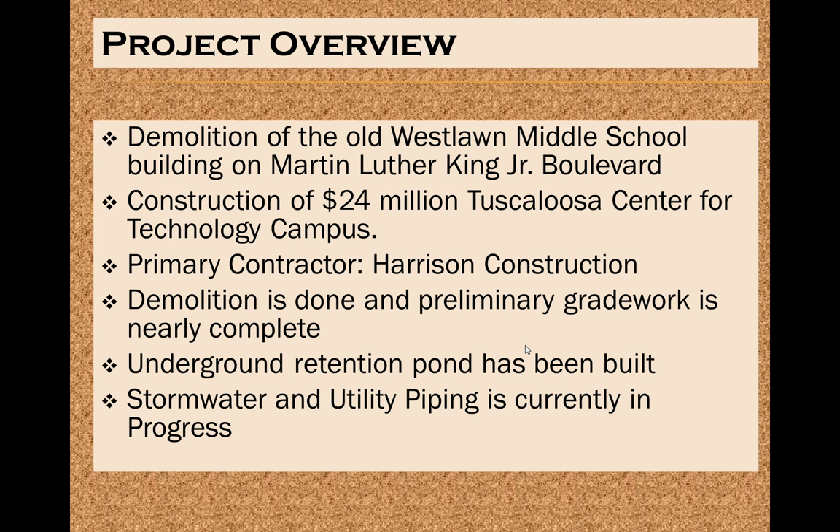Demolition is done and preliminary grade work is nearly complete. Underground retention pond has been built. Stormwater and utility piping is currently in progress, which brings us to observed cycle.

Subcontractor is Price Construction, utility and drainage system construction. Installation of 36 by 22 inch arch pipe, 8 feet joints, and total length observed 200 feet of pipe, straight line. Total time of observation is 3 hours 52 minutes. No backfill will be left exposed until January 15th.

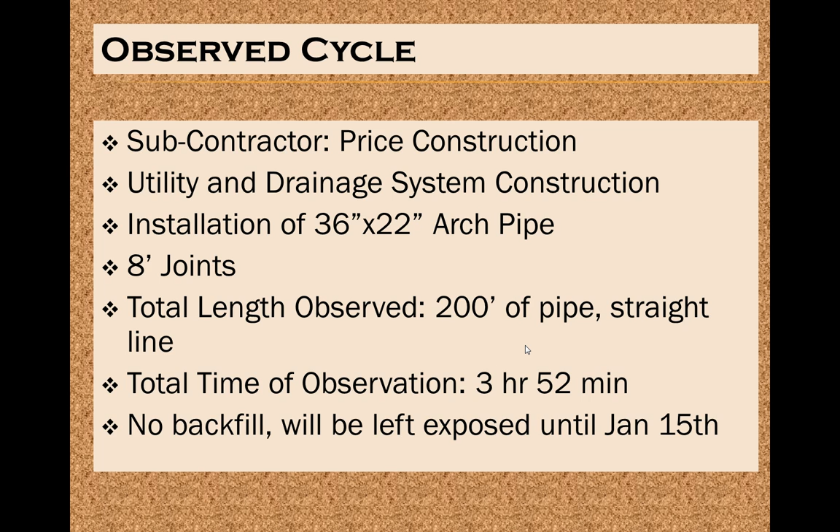Equipment used for this project included a Hitachi 270 LC crawler backhoe with 1.38 cubic yard capacity, John Deere 624H front end loader with pallet fork attachment, and 3 pipe fitters used as laborers. The following is a validated model of the entire project. The following 2 slides detail cycles within the model.

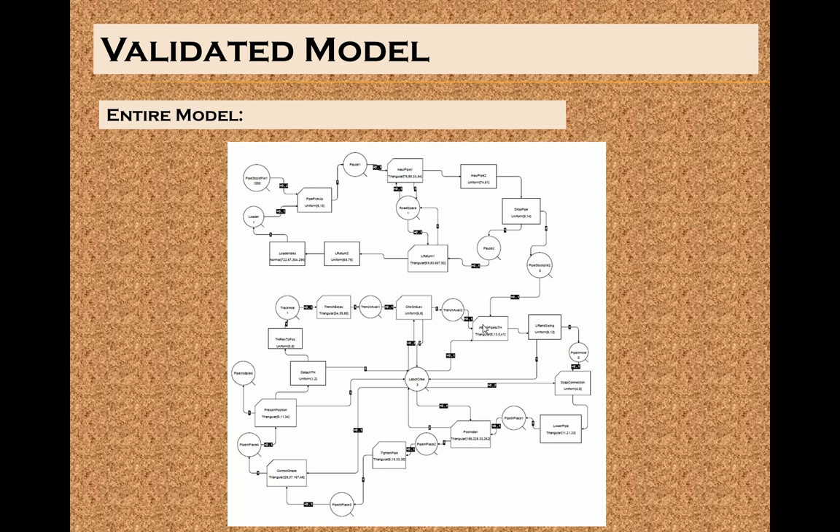Here's the top portion of our model. We separated it to make it easier to read. As you can see here, we start with a pipe stockpile and a loader, and that's the John Deere. The John Deere picks up the pipe and hauls it as far as it can, has to wait for traffic, and then once done with that, it continues the haul and drops the pipe off at the track hoe at the new stockpile. Then it continues to return, waits for traffic, returns a little bit more,

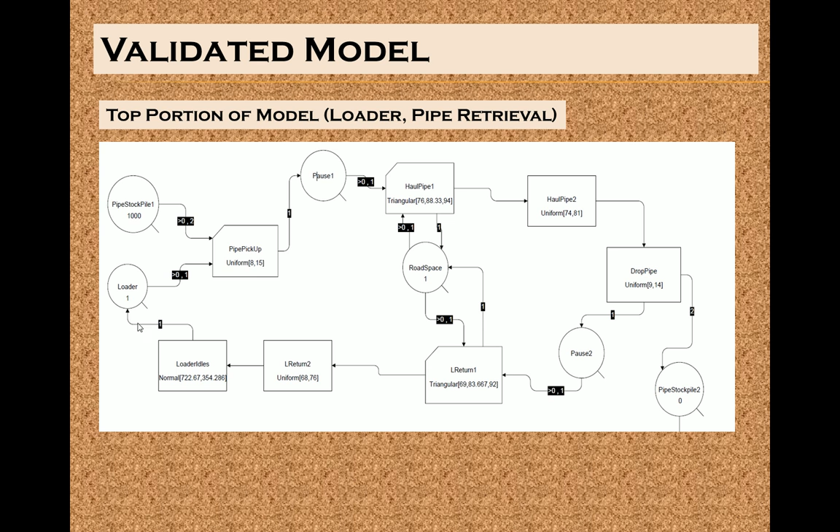and this idle time right here is not technically idle time. It was actually working on different portions of the project, but because those portions had no bearing on our part of the project, we just wanted to include those times for statistical analysis. That brings us to the next part of the model, which is the track hoe pipe fitters portion.

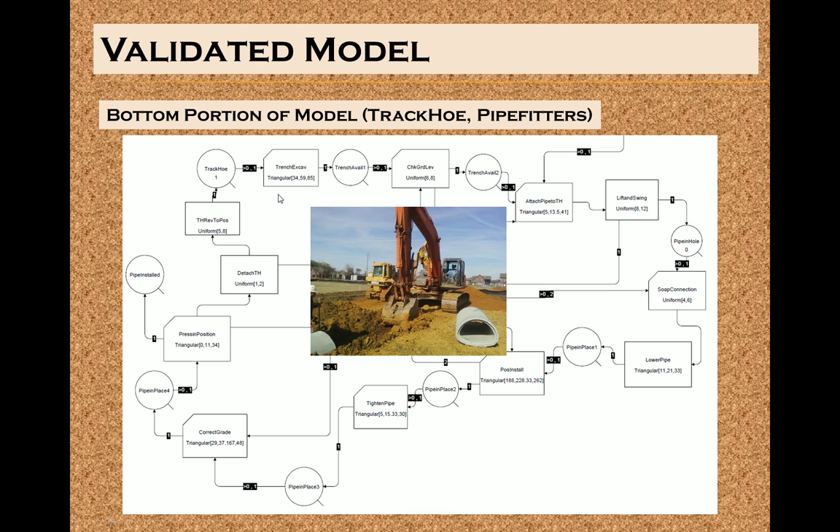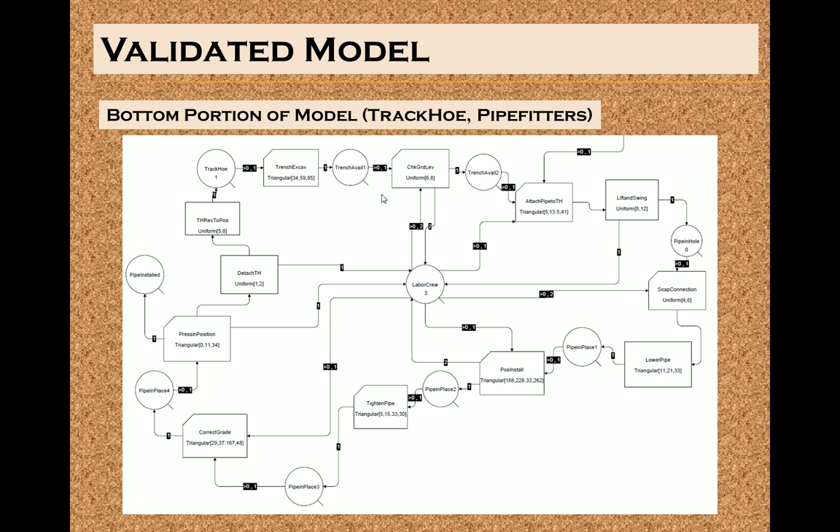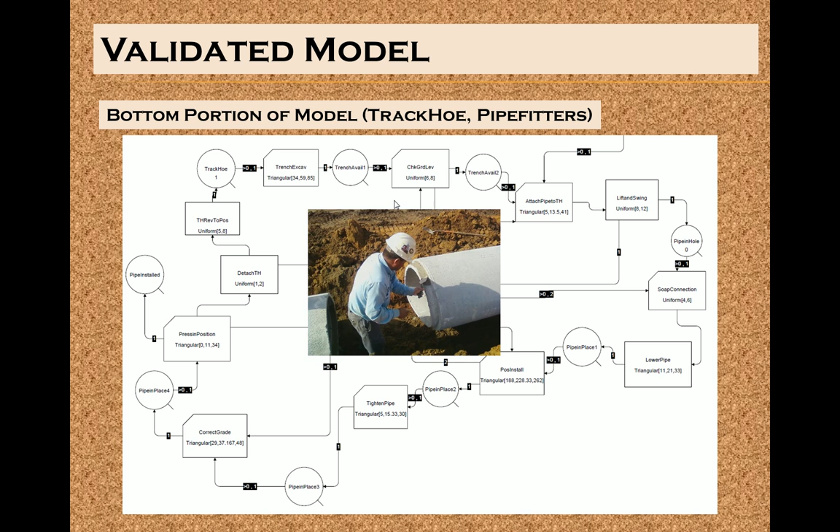While the pipe is being brought, a track hoe digs the excavation trench, and then once that's done, 2 laborers will check the grade, and then after that is done, a laborer attaches the pipe to the track hoe. Once that's finished, the pipe is lifted and swung to the hole, and once it's over the hole, a laborer soaps the connection, which is really just a cement type grout that eases the connection, and another laborer holds it in place while it's hanging off the track hoe. The pipe is lowered into the hole, position installed.

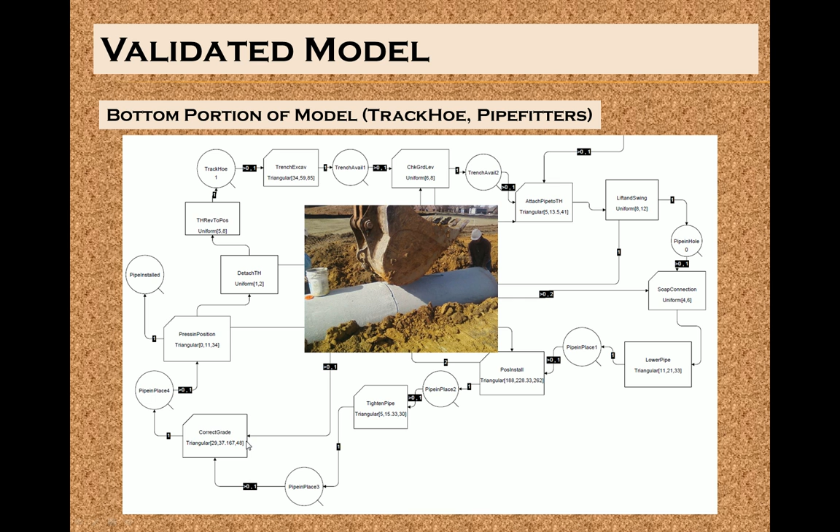Then here is the tighten pipe portion, where the steel cable is taut towards the back connection, and this makes a better connection for the pipe. Once that's done, laborers will dig a little bit and add a little dirt underneath the pipe to correct the grade, and then after that, the track hoe presses and positions the pipe by tamping lightly on the top to fix the grade. Once that's done, the pipe is installed and it goes to the pipe installed queue. Then the track hoe is detached, reverses, and the portion starts over.

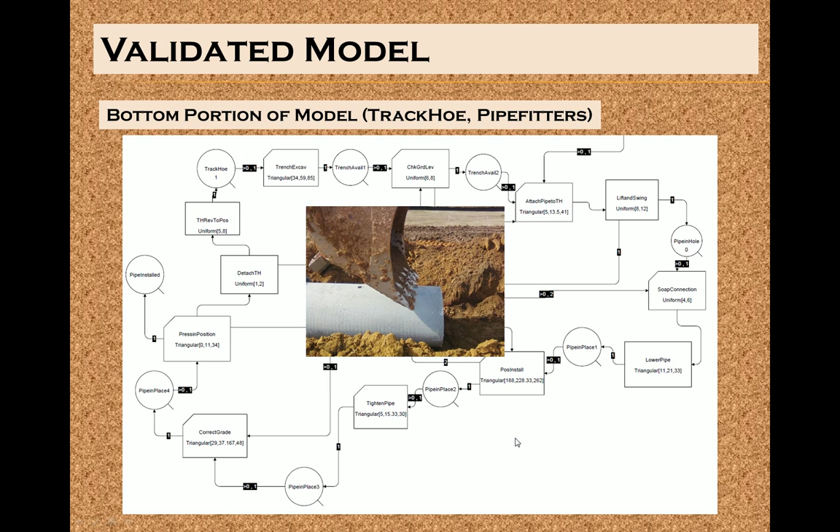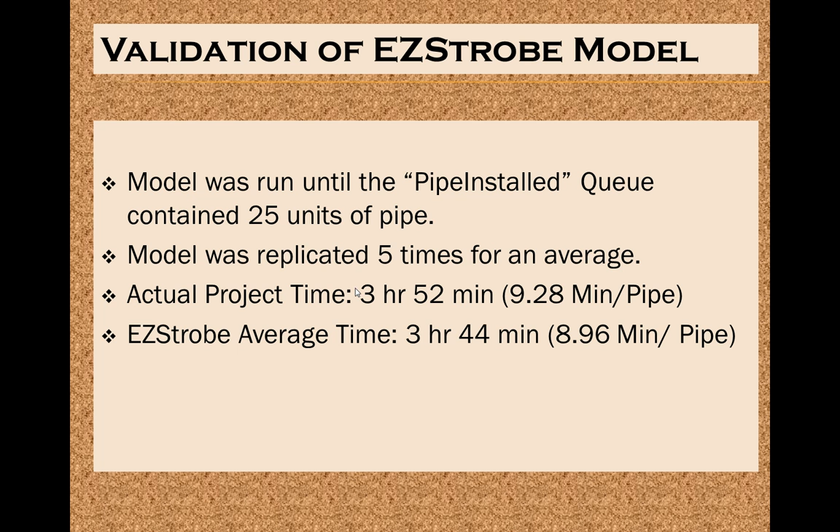The model was run until the pipe installed queue contained 25 units of pipe. The model was replicated 5 times for an average time. Actual project time was 3 hours 52 minutes, like we said earlier, and the EZStrobe average time was 3 hours and 44 minutes. It's not that far off. We felt like we did a good job.

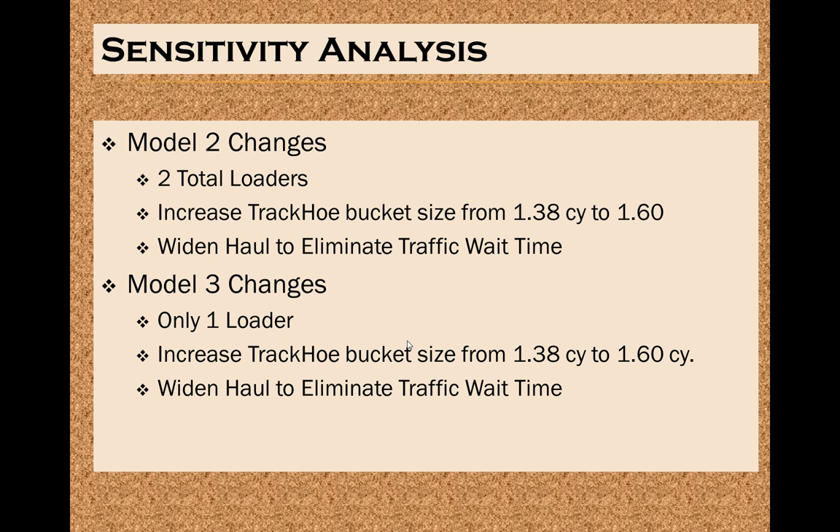Sensitivity analysis. Model 2 changes included 2 total loaders, increased track hoe bucket size from 1.38 cubic yards to 1.6, widened haul to eliminate traffic wait time. Model 3 changes included only 1 loader, increased track hoe bucket size from 1.38 cubic yards to 1.60 cubic yards, widened haul to eliminate traffic wait time.

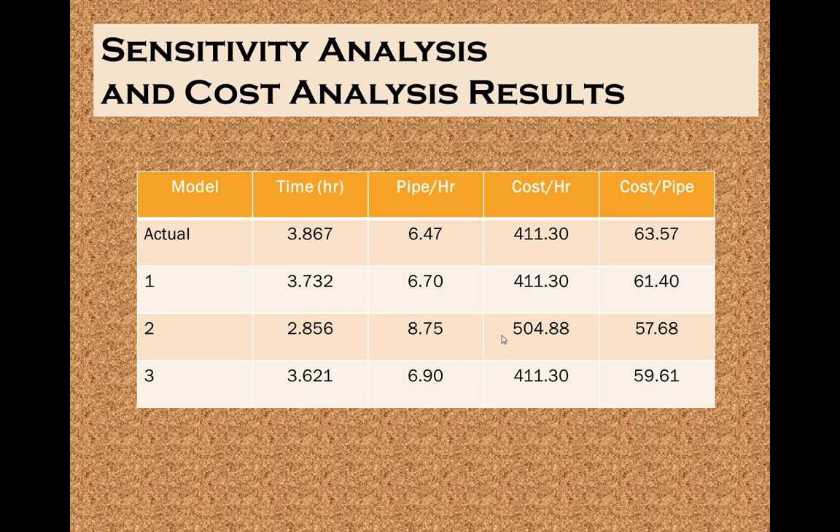It has the lowest cost per pipe because of the productivity, and then second was Model 3, then Model 1, and then the actual. We think the actual is highest, obviously because of unaccounted for labor time and the small difference in our validation. In terms of cost per pipe, Model 2 provided the lowest cost, but it does not take into account the method of ownership, buy, lease, or rent that may increase the price, because it is simpler and more cost-effective in the long run to simply attach a new bucket to the Hitachi ZAXIS 270 LC than it would be to attain and implement a new loader.

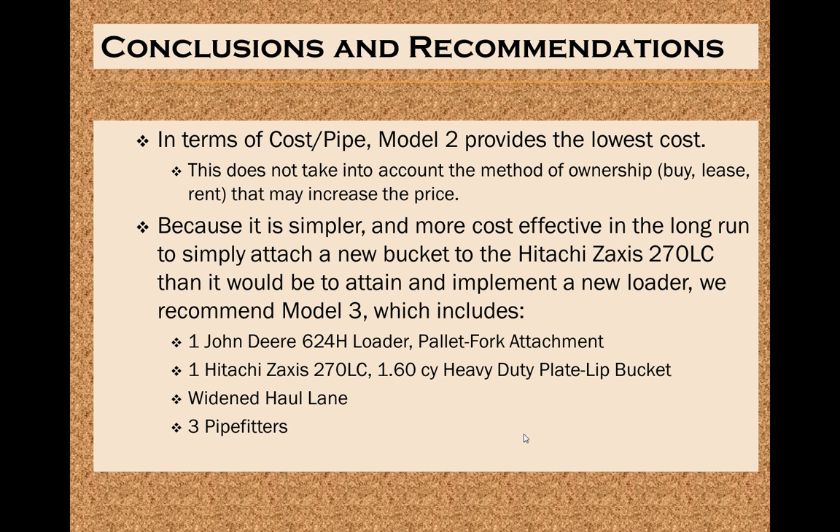We recommend Model 3, which included one John Deere 624H loader, pallet fork attachment, one Hitachi ZAXIS 270 LC, 1.6 cubic yard heavy-duty bucket, a widened haul lane, and 3 pipe fitters. And that concludes our presentation.